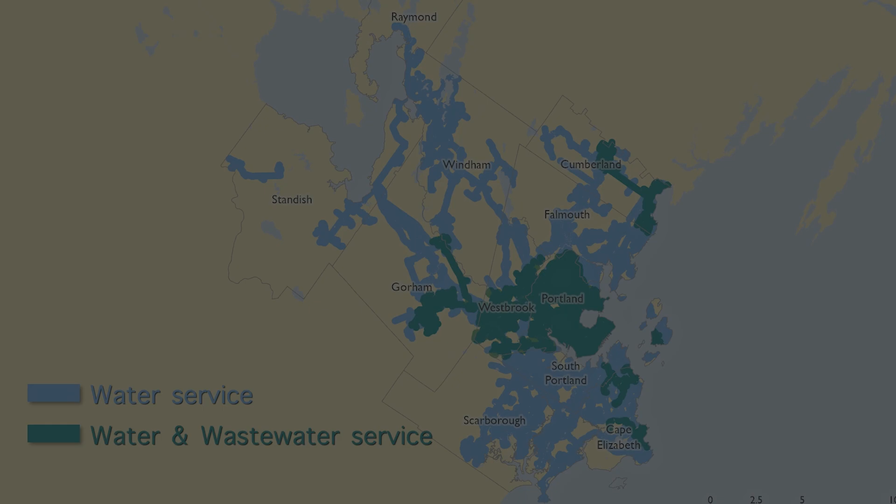Established on October 18, 1972, the Clean Water Act set new pollution reduction requirements with a broad goal that all waters in the U.S. should be swimmable and fishable. That goal paved the way for thousands of wastewater treatment facilities to be constructed around the country. Wastewater plants have played a vital role in cleaning up the pollution that was plaguing our waters, closing beaches, and devastating aquatic life.

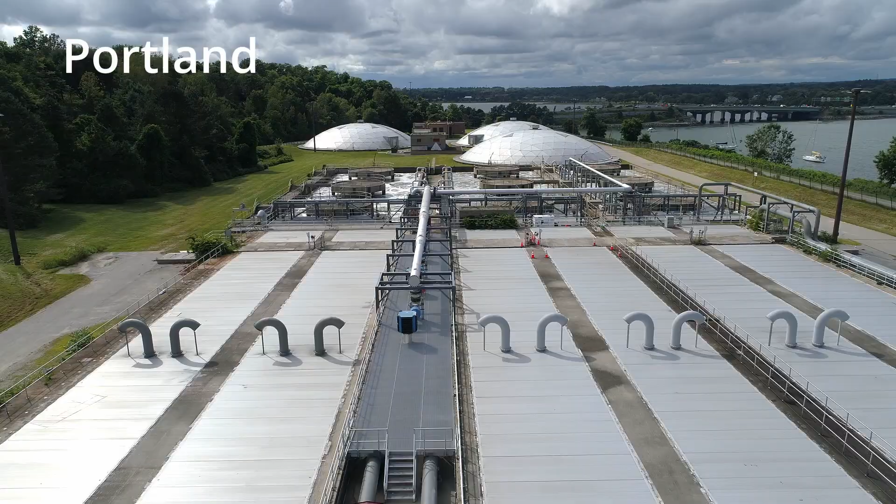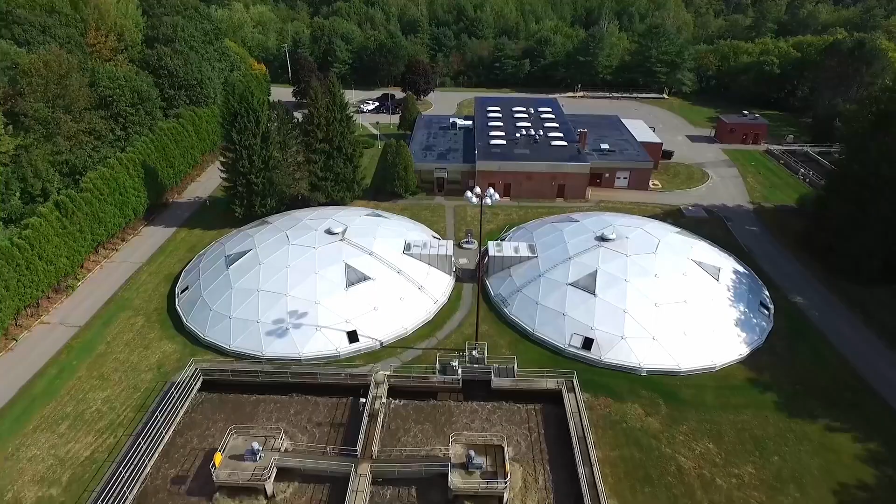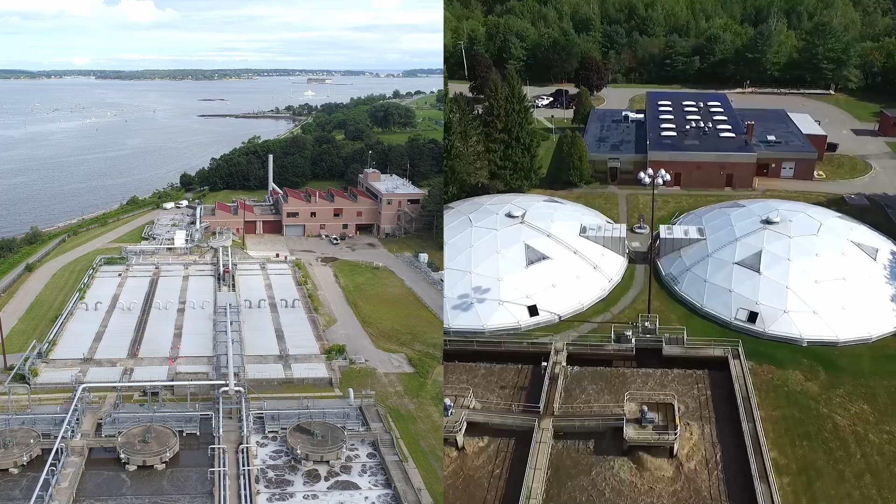The Portland Water District operates 5 wastewater treatment facilities in Greater Portland and oversees 2 of the largest industrial pre-treatment programs in the state. Over decades, millions have been invested to improve treatment to protect Casco Bay. The Westbrook-Gorham Regional Wastewater Treatment Facility was built in 1978, and the East End Wastewater Treatment Facility opened a year later in 1979. Together, these plants process over 25 million gallons of wastewater a day and prevent 8.7 million pounds of pollution from entering the environment.

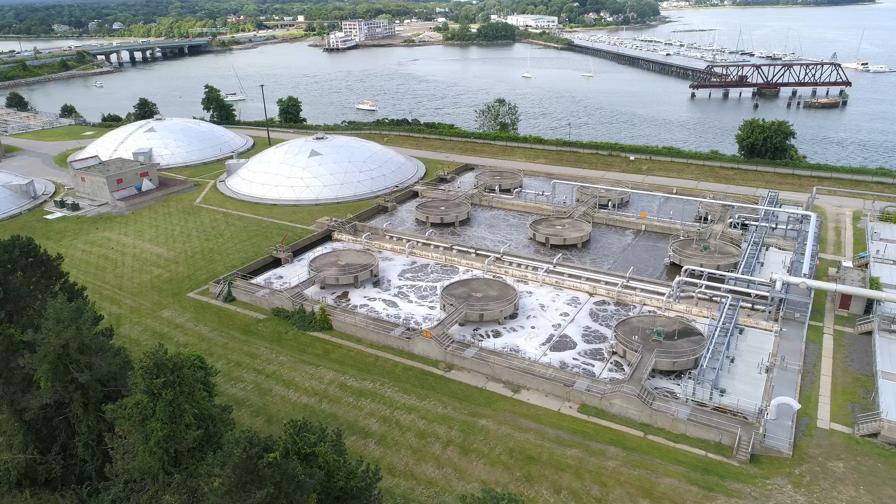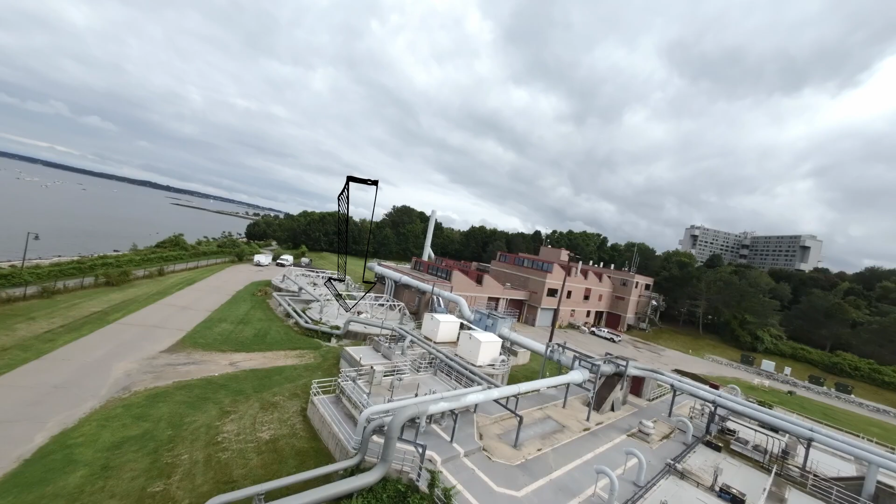Wastewater from homes and businesses is collected in a series of pipes called a collection system and is pumped to the treatment facility through pump stations. You may have seen these pump stations around Greater Portland and wondered what they do. Once wastewater arrives at the treatment facilities, cleaning begins with screens that remove debris like sticks and trash. The wastewater then flows through grit chambers that separate and remove inorganic material such as sand and stones from the wastewater.

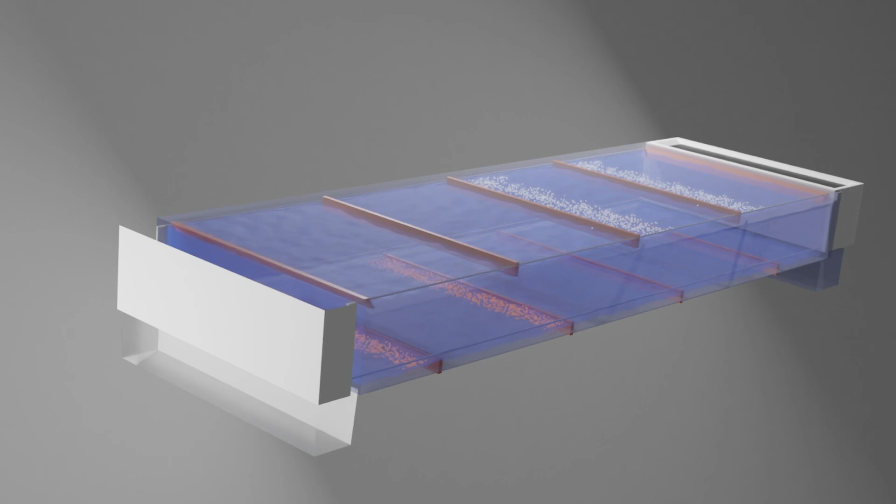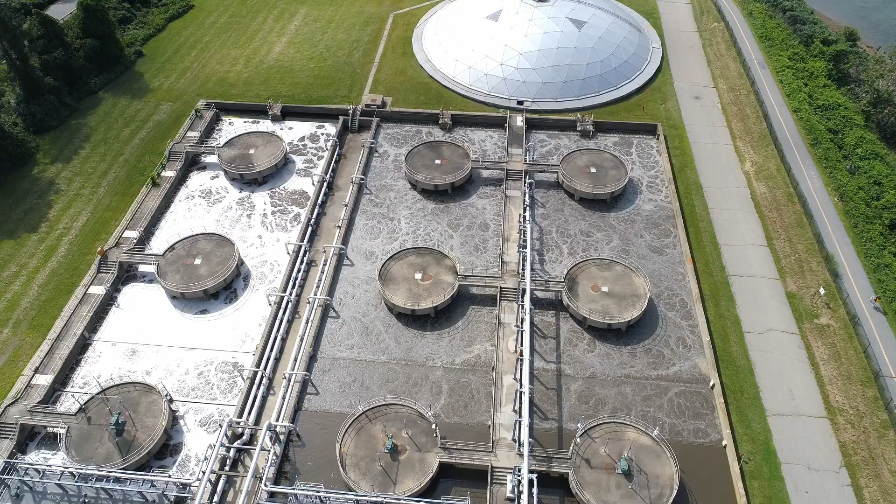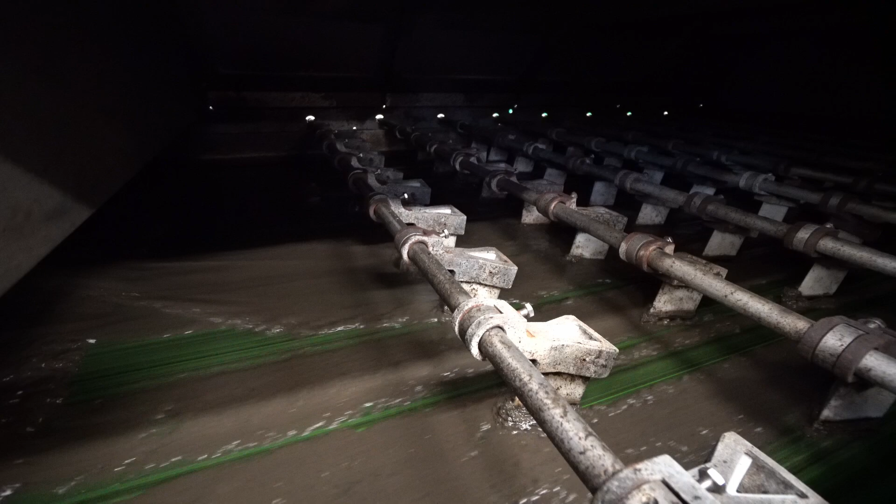The partially treated wastewater then moves to the primary sedimentation basins, which slows the flow to a rate that allows heavy solids to settle to the bottom of the tank and grease and oil to rise to the surface. Both are removed. Next, the partially treated wastewater moves to the aeration tanks, where air is bubbled in to provide mixing and oxygen to feed naturally occurring and helpful microorganisms. In an oxygen-rich environment, the microorganisms multiply and consume organic material. The microorganisms digest the pollution in the wastewater. After aeration, more than 90% of organic material has been removed from the wastewater.

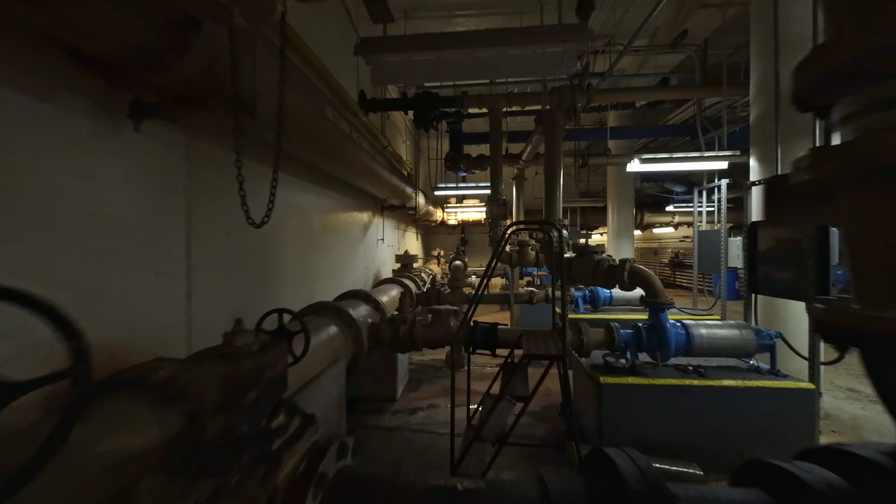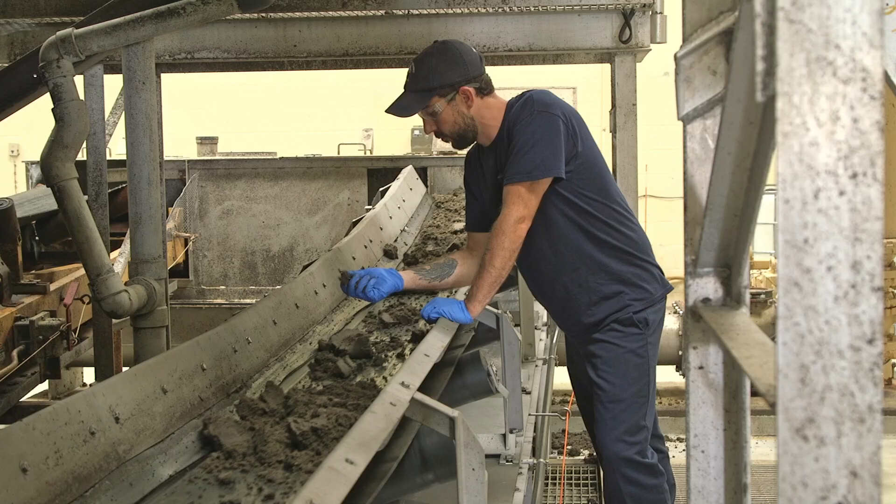Secondary clarification happens under these domes, where microorganisms are separated from the treated water. A portion of the settled microorganisms are pumped back to aeration to continue treatment. The last step in the process is disinfection. Chlorine is added to kill any remaining microorganisms that may have been present in the water. Excess chlorine is then removed, and the fully treated water is safely released into the environment. Throughout treatment, operators and environmental scientists constantly monitor processes and sample the wastewater to ensure that our goals to protect the environment and Casco Bay are achieved.